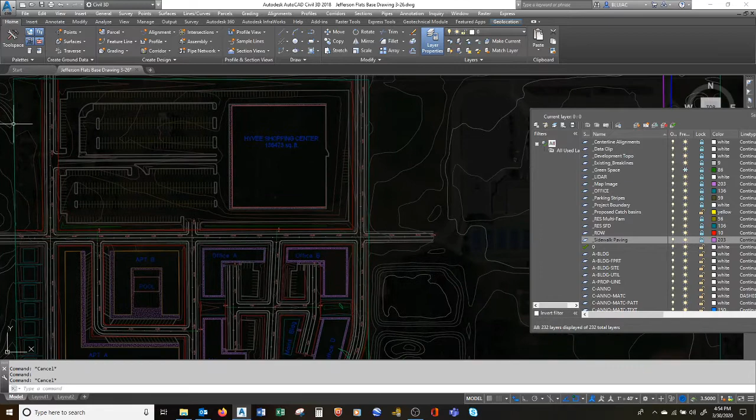Okay, this is the second video in our Jefferson Flats video series here on this project, and I'm going to talk about analyzing this development topo surface to figure out where we want to put our catch basins. That is the ultimate goal of this phase 1 assignment, and so I want to find that development topo layer.

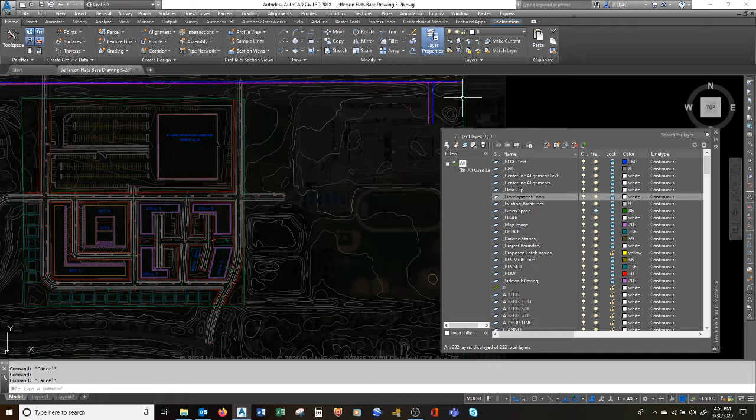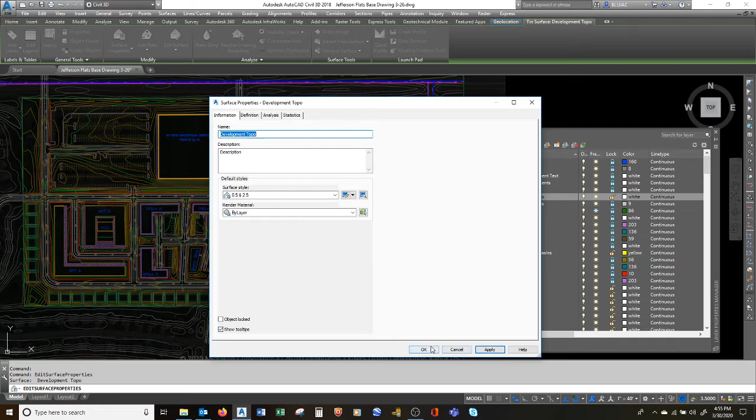I've got my layer properties button toggled on here, and I'm going to start by unlocking that surface layer so I can go to the surface properties and select a different contour style. I want to see more contours in this drawing, and you should have a 1/2 foot contour interval, and if I select that and apply and OK, notice I get it should be 5 times as many contours on my screen. And now I can really start looking at what's going on with the elevations across this drawing.

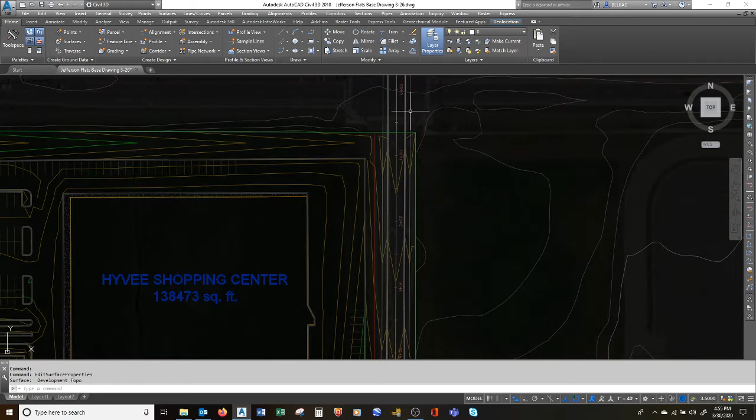And maybe you want to turn off a few of the other layers so the drawing is not quite so cluttered. Maybe I can get rid of these existing break lines, for example. So existing break lines, I'm going to freeze that layer just to turn those lines off. And this is curb and gutter lines. I'm going to leave those on for now because that might influence our decision as to where we put catch basins. And then I'm just looking to see if there are any other layers I can turn off right away.

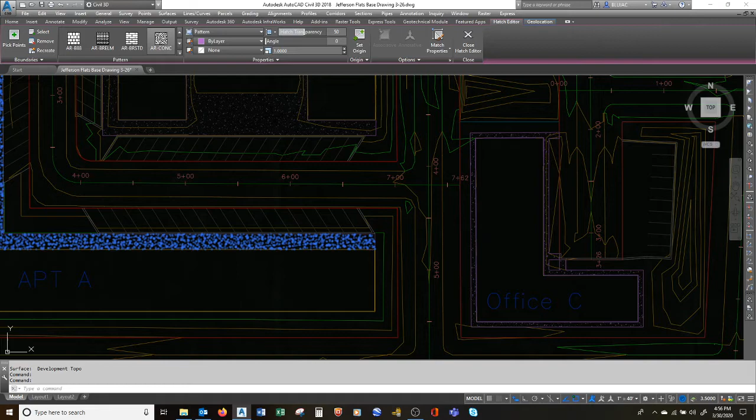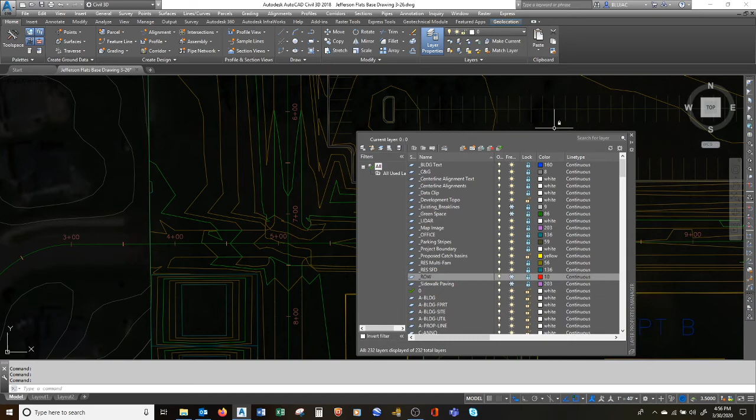Maybe I want to turn off this hatch layer, and that happens to be on the sidewalk layer. So I'm going to turn off this sidewalk paving. And maybe I even want to turn off these red lines. This is the right-of-way layer, so I'm going to turn off the right-of-way, freeze that. And actually, while I'm at it, I'm going to do the parking stripes as well. I'll turn those off.

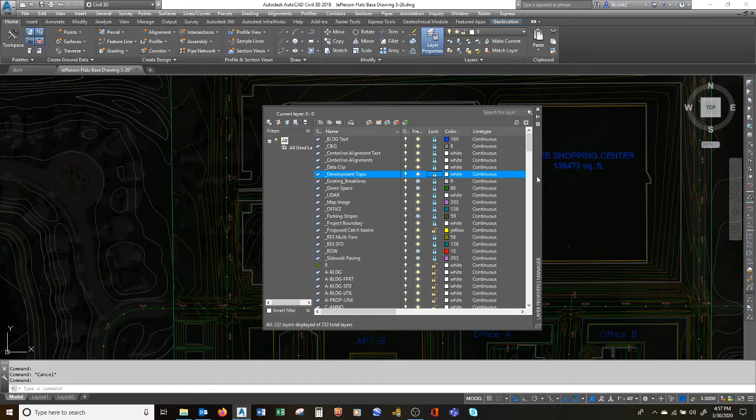So now we kind of have a blank site, and we can start to figure out what we want to do with the water. So first, I'm going to just click on the development topo layer, and actually bring this layer properties back. I'm going to lock that layer that the surface is on so I can't accidentally make any changes to it. But if I select that surface, my ribbon changes and I get a bunch of analysis tools here. So I like this water drop tool, and when you click on the water drop tool, it does give you a few options here, including a path layer. So what layer do I want these lines to show up on?

If I leave it on layer 0, they're going to show up as white lines, and I think actually I want to see a different color. So I'm going to click on that 0 cell here, and that gives me an ellipses button. I'll click on that, and I can pick an existing layer, or I can click on this new button and create a new layer, which is what I want to do. So layer name, I'm going to put an underscore in front of that to throw it to the top of my list in the layer properties, and I'll call it water drop.

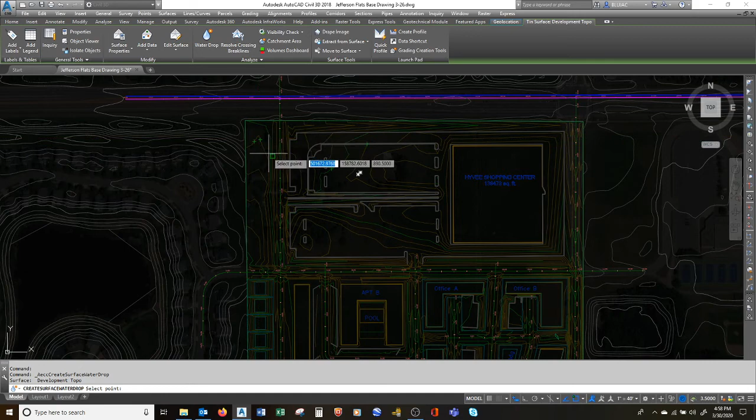And then I'm going to change the color to something that's going to show up a little better. Maybe I'll choose a red color. You can choose any color you want. I'll leave the rest of this alone. And then when I click OK and OK, I should see that water drop layer show up here. So now when I click OK, I can start dropping water on my surface, and right now my O snaps are turned on. You see that my cursor wants to jump around a little bit. I'm going to turn my O snaps off with F3, and then I'll really just start clicking around in the drawing to see where does the water want to flow to.

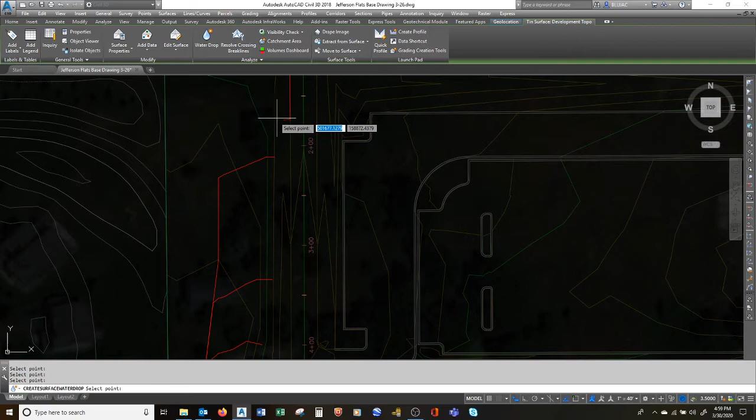And pretty obviously water wants to flow downhill. I don't have any of these contours labeled, so you'll have to figure out what's your high point, what are your low points, or you can go through and label some of your contours if you like. You could also just hover your cursor and it will show you the elevation of the development topo and some of the stationing for nearby alignments. But anywhere I hover my cursor, see I get that development topo Z.

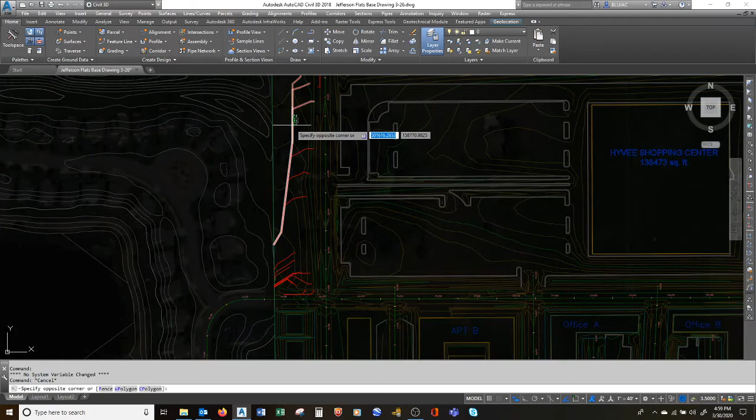So here's 8935.23 feet. If I move my cursor again, I'll get a different elevation. And generally speaking, this site is very flat. So we're going to have to be a little creative maybe with some of our storm design here.

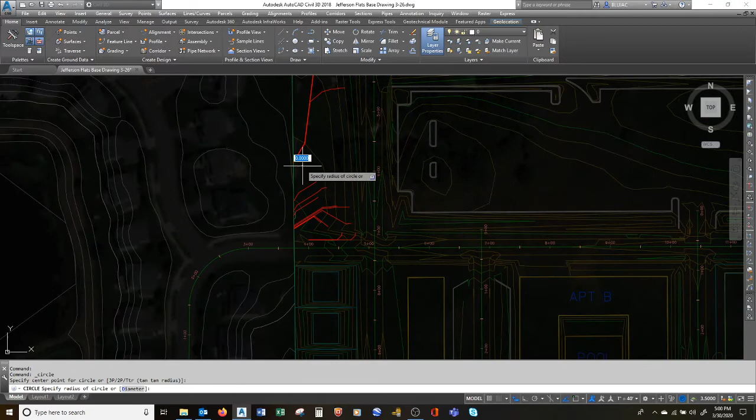But it looks to me, at least in this quadrant or this little corner of our drawing, the water is generally flowing from the north to the south, and then kind of over to the west here we've got a little low spot. And I'm going to want to identify that as a potential area for a catch basin. I'm going to just create a circle and say this is a low spot here, and we're going to have to do something about the water in that area.

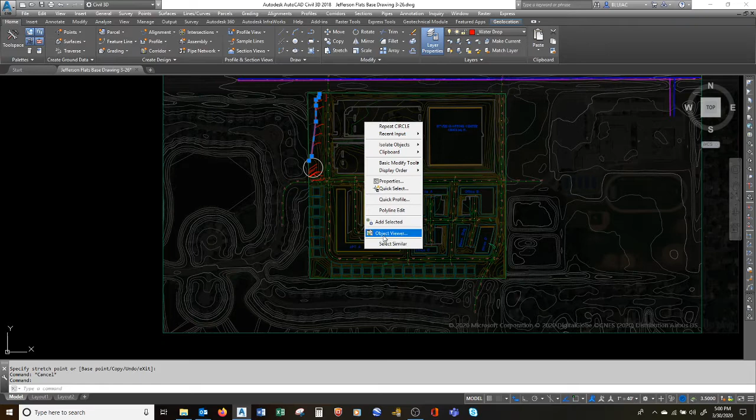And so when we created this new layer, part of the reason that we did that for the water drops is so that I can select one water drop, right click, and select similar. It's going to pick all of those water drops, and I can delete them. So that's going to be a good way to keep your drawing clean, is to be able to delete those water drop lines after you don't need them anymore.

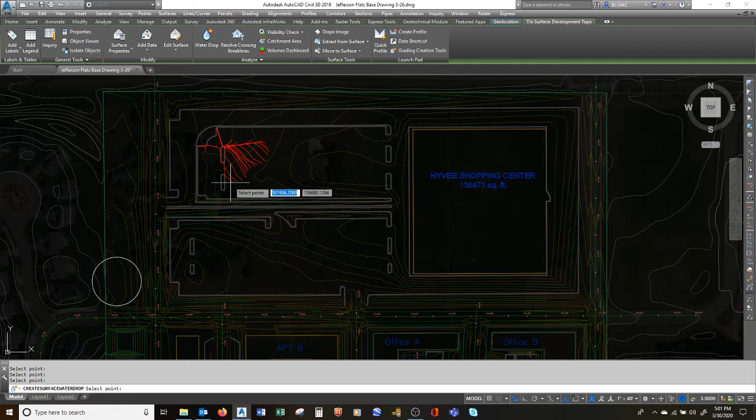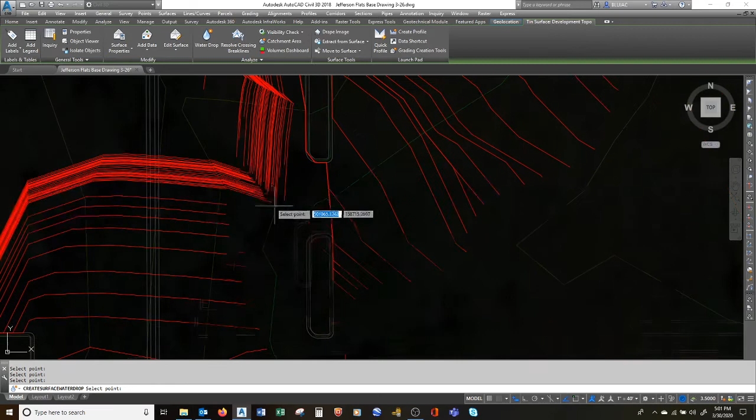I'm going to go back into the water drop tool, make sure I'm still on that water drop layer, and continue my analysis. I'm going to click a whole bunch here, and I want to show you what happens as I'm clicking. Notice these lines are going in opposite directions, and if I make those lines really dense, eventually we can start to identify actually a natural break line right here where the water is going to flow in opposite directions. And that may be handy later when we're having to do our watershed analysis.

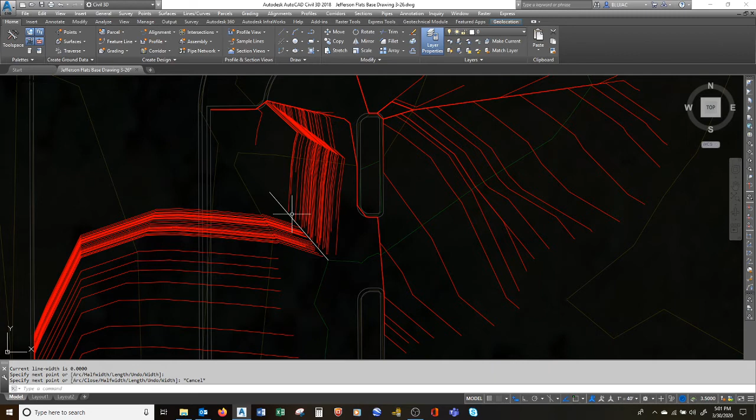But I could create a polyline. Here I'm on layer 0, so it's going to be white, but basically that line right there is a ridge line or a break line where water is going to flow in different directions on either side of that line. And it should sort of line up with these contours. Notice this contour has sort of a chevron shape to it. Here that line started at the corner of a contour line. So we'll use that technique a little bit later on to start identifying watersheds.

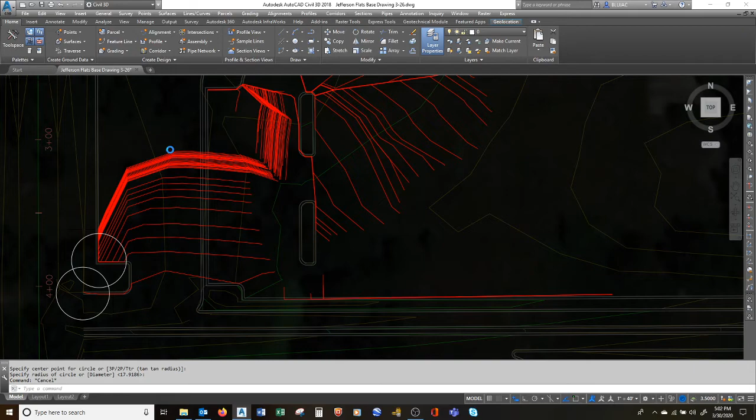But it's also going to help you with this water drop tool, again, to identify somewhere we might want a catch basin. So right here we might want a catch basin, and also in this corner of the curb and gutter. Notice none of this water flowed up and over the curb and gutter. It's going to take a lot of clicking, a lot of water drops to figure out where we want to have catch basins, because on a 39-acre site, it's likely we are going to have a whole lot of catch basins.

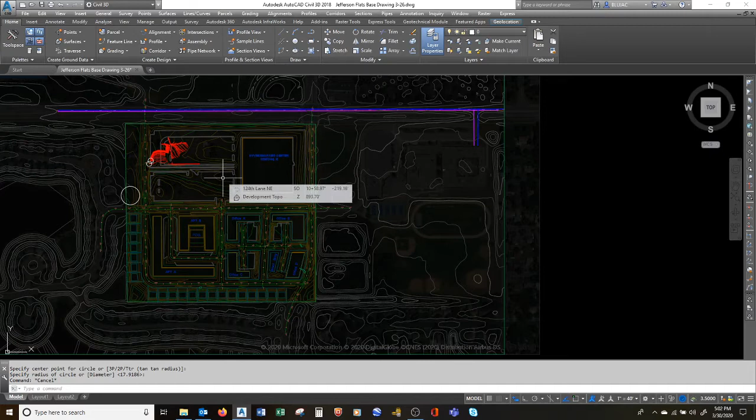The more detailed your analysis is, the more catch basins you will probably realize that you need on this site. So my advice again, create a separate layer for these water drops so you can select similar and delete them, and just be thorough with your analysis.

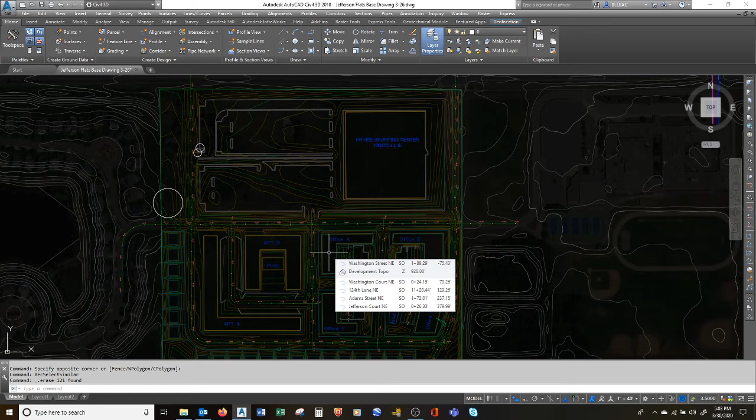Now you can ignore anything that happens inside these building footprints. We will assume these buildings have flat roofs with some internal storm drain management. They're going to have roof drains that are going to tie into a separate system, and we'll ignore that for now. Right now, just focus on the surfaces outside the buildings, but inside this 39-acre project area.

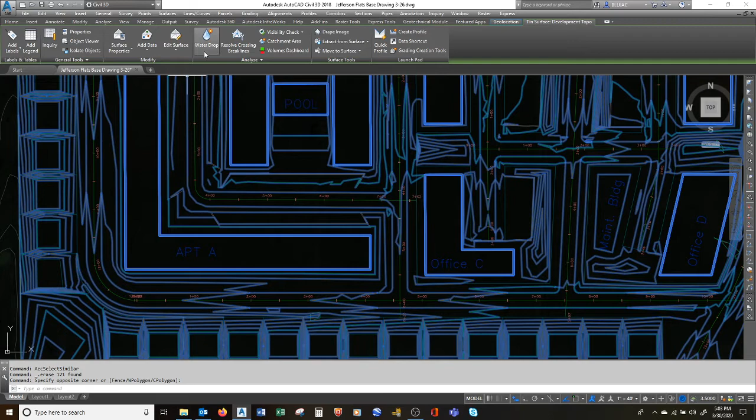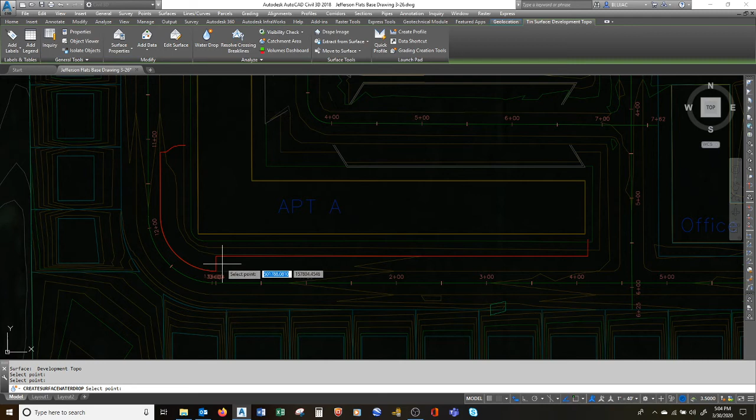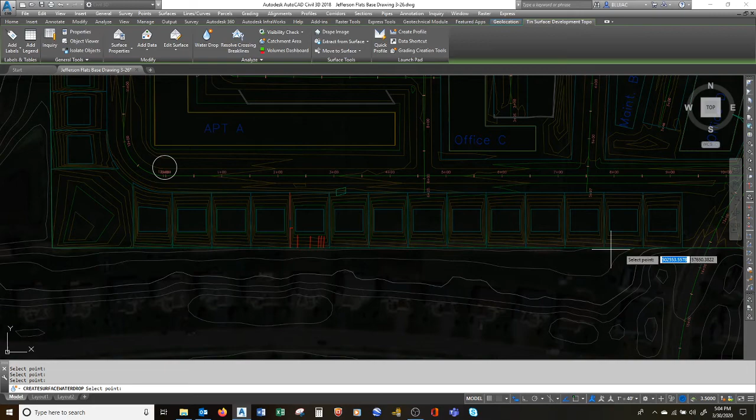And as far as these residential lots, I'll select the surface and do some more water drops here, but all of the water should be handled appropriately on these lots. And we will just assume that if the water is flowing off of our project site on these residential lots, that's okay. In real life, that might not be okay, but we will assume for the time being that this is just an extension of a previously engineered development that was expecting that.

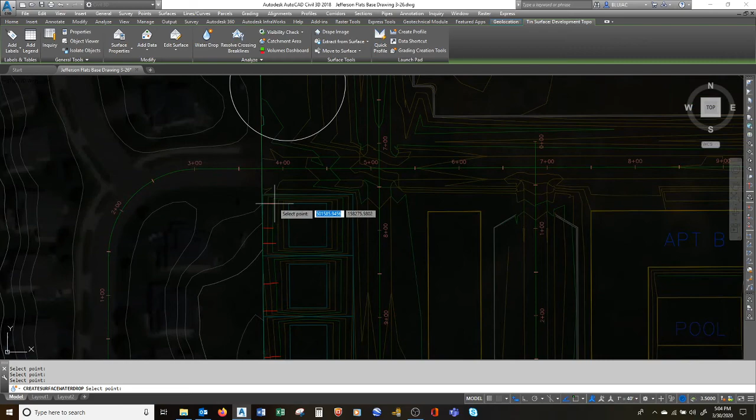So again, anything that's flowing off of our site we can ignore, but all of these front lots here, or the front side of these lots, should be draining to a pretty clear area. So I will leave you to analyze that surface to the best of your ability, and we will talk about watersheds and catchment areas in our next video.